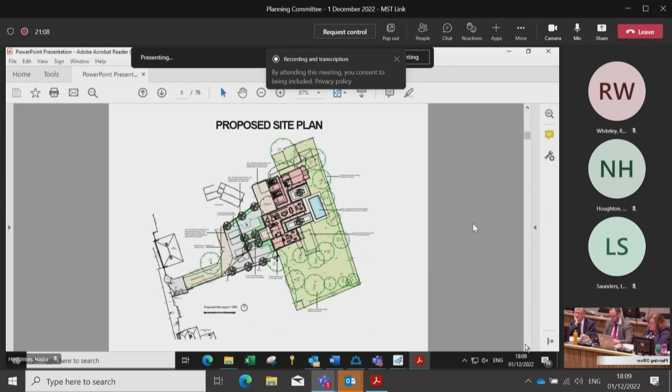So members viewed the site, and officers indicated where the replacement dwelling would be located, along with the location of the Orsett Conservation Area and Greenbelt boundary. This slide is one that I showed members at the site visit and have added to the presentation for people's benefit. You can see the blue line bisecting the site - to the left lies the conservation area, to the immediate right lies the Greenbelt.

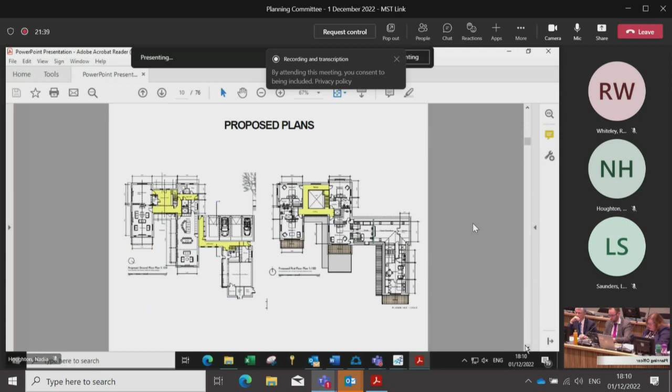There are no other updates for members since this site visit. The proposal would continue to be considered contrary to Greenbelt policy with respect to its overall size, footprint and volume, and would be considered inappropriate development harmful to the openness of the Greenbelt. Secondly, there continue to be concerns regarding the layout, footprint, scale and use of materials for the proposed replacement dwelling, and its poor relation to the existing character and appearance of the conservation area. The report and recommendation is as per page 40 in your agenda.

Happy to take any questions if any members have any. Thank you very much, Nadia, for the update. As we did say, not everybody on the committee can actually vote on this application this evening. Are there any questions for the officer?

Councillor Piccolo: Thank you, Chair. Can you just confirm if you found out - when we visited site, there were a number of mature trees along the back boundary and down the side. We were led to believe that these trees were on the boundary line, and the fence behind it has actually been in place for 20 odd years, in other words, they were there prior to the current landowner moving in. Can we just confirm that was actually the case?

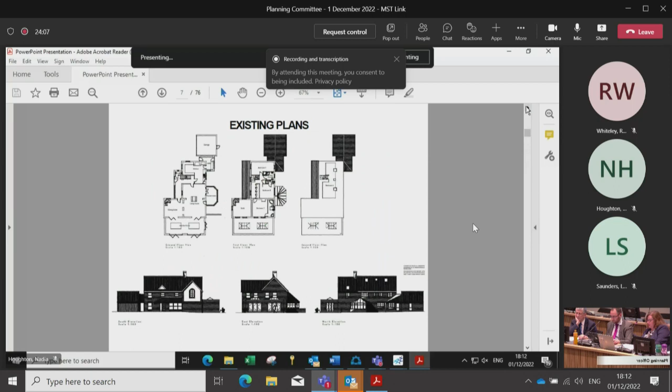I can confirm, I appreciate I wasn't at the previous committee meeting, but I understand what Councillor Piccolo's asking, Chair, with respect to the position of the boundary and its relationship to the curtilage of the dwelling. I can confirm that the Lawful Development Certificate from 2006 did identify the extent of that site as all falling within the red line curtilage of the property, as we saw on site, and indeed is shown on the plan. So what the officer is referring to, if you look at the boundary of the site on the far east, you can see what's indicated as a row of trees there. That forms the actual extent of the residential curtilage, which is also shown on the site plan. So that is as shown, if that answers your question.

It was just that was there, that's been there for some significant time, prior to the current landowner moving in. It's been there for many decades now, and that's shown in the planning history and the Lawful Development Certificate referred to before. Okay, fine, thank you.

Councillor Watson: Thank you, Chair. Can I just follow on from that question? If the new build went ahead, is any of those trees in jeopardy of being pulled down or cut down in order for the build to happen?

No, Chair, they aren't. Going back to the layout, that's probably the best one I can show you that shows it most clearly. The majority of the trees and the vegetation on the site would remain. There may well be the odd smaller tree and shrub that may be removed within the main part of the garden, but those lying along the eastern boundary and the southern boundary would remain.

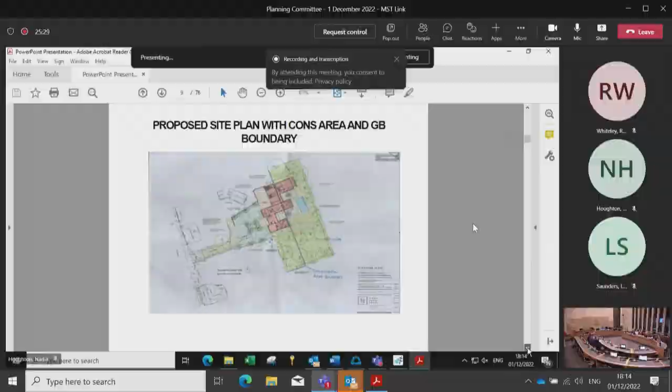Are there any more questions from the members for the officers? Councillor Piccolo: I don't suppose you'll have the answer to this, but do we know how regularly the footpath that runs along the side of the property is used? Is it well maintained?

We don't have any data in that regard, because none has been collected, but it is a public right of way. I've walked upon it whilst this application's been considered, because I wanted to see how accessible it is. It's easily accessible, and not just in that immediate part.

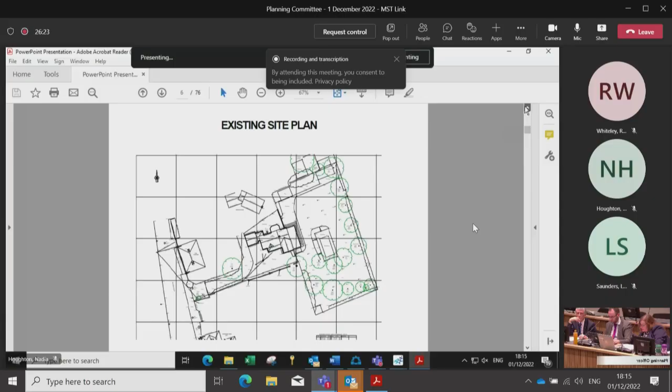So if I go back to the site plan, this one shows it best. If you can envisage where the Whitmore Arms is, I can show you on here. This is the Whitmore Arms. You can see where the cross is on the centre, just south of the Hollies, and this is the entrance to the footpath, which is clearly labelled. This part is hard surface, the immediate part that runs down past the side of the car park.

Then it becomes less hard surface, but it is well used. I walked certainly along to here, and at this point it's a track between the fields, but it's labelled, it's designated, and it's used. So that's as much as I can really comment with regards to how well used it is.

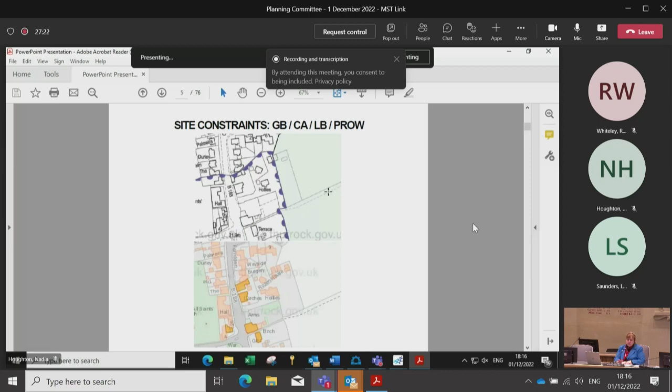I'm just going to take advice. Councillor Little, can I just ask the clerk - because you're excluded from this application, the same as myself, because we weren't at the previous planning committee, and you're not here as ward member this evening.

So just for clarification, so we are clear, Councillor Arnold, Councillor Carter, Councillor Piccolo, Councillor Watson, Councillor Shinnock and Councillor Tandy are the members of this committee that can actually ask questions, enter into debate and vote on this application.

Highways Engineer: Thank you, Chair. I would just mention that I took part in the charrettes for the local plan, where members of the public, local councillors and local people could talk about various bits. On the one I was on, it was mentioned that this is an important link between the village and the surrounding green areas, just to mention that.

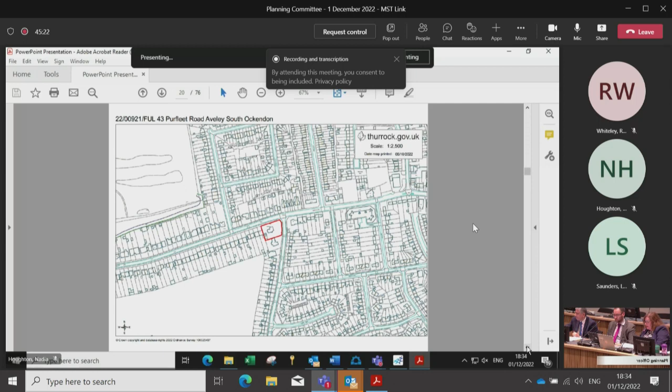The application site comprises a detached bungalow and garage building on a corner plot located within a residential area of Aveley. This corner plot is located at the junction of Purfleet Road and Love Lane, and the site is bordered by residential development.

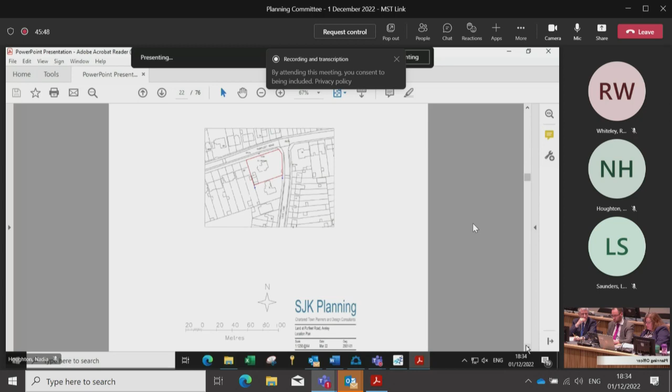Up until March 2021, the site had established trees along the boundaries as well as extensive vegetation on the site. The existing access is located on Love Lane and leads to a garage at the rear of the site. The site sits at a slightly elevated position above the main road on Purfleet Road, with ground levels sitting approximately 1.4 metres higher within the site compared to the highway on Purfleet Road.

The proposal seeks the redevelopment of the site to provide 5 dwellings, comprising 2 pairs of semi-detached 2-storey dwellings and 1 detached property. This layout plan shows the proposed layout with the dwellings located broadly along the notional building line of the existing pattern of development in Purfleet Road.

The existing access to Love Lane would be removed and a new vehicle access would be proposed, providing a 2-way vehicle access on Purfleet Road. The pedestrian access on Purfleet Road, which exists at the western end of the site, would be resited to the eastern half of Purfleet Road.

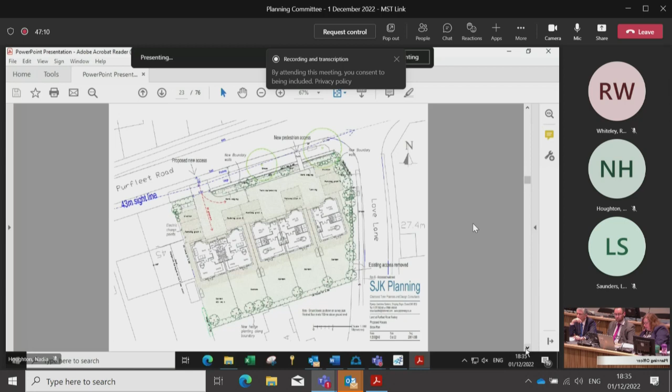The private rear garden serving the 5 dwellings would be 12 metres in depth at its maximum, which would be deeper than the previous refusal that members considered in June this year. While the rear garden depths would still be relatively short, the proposal would not be considered likely to result in such an unacceptable loss of privacy for the neighbour to the immediate south of the site on Love Lane to justify refusing the application for this reason.

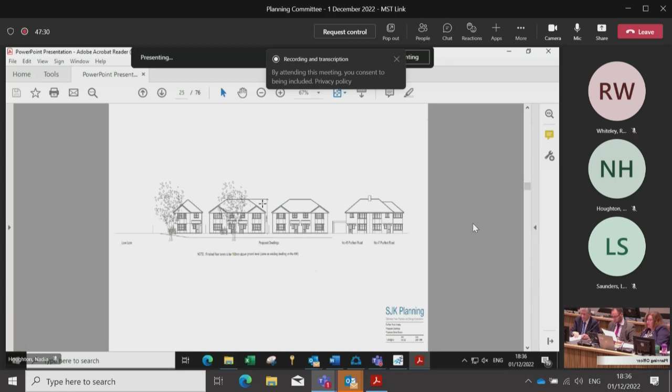Here's an elevation of the proposed street scene. As you're looking at it, the detached property would be closest to the corner, with the 2 pairs of semis fronting Purfleet Road, with the existing development to the right of the image. And here are some elevations of the proposed semi-detached pairs and the detached property, along with some floor plans. The proposed appearance of the properties would be considered appropriate.

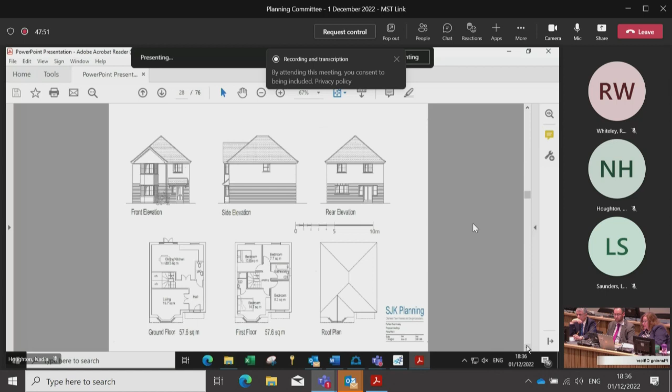The proposal would provide 12 parking spaces on a car-dominated frontage, which is a concern and is included as a reason for refusal. The internal layout is considered relatively tight with respect to manoeuvring, and there is particularly close proximity of parking spaces to the front windows and doorways serving the dwellings.

The applicant has been asked to provide additional swept path analyses to demonstrate that all car parking spaces could be safely and practicably accessed and egressed. The applicant has provided these; however, the highways officer is concerned that the layout would still be particularly awkward and tight, resulting in some spaces not being realistically usable, and there is concern that parking would migrate onto the surrounding roads, which would be unacceptable in this location.

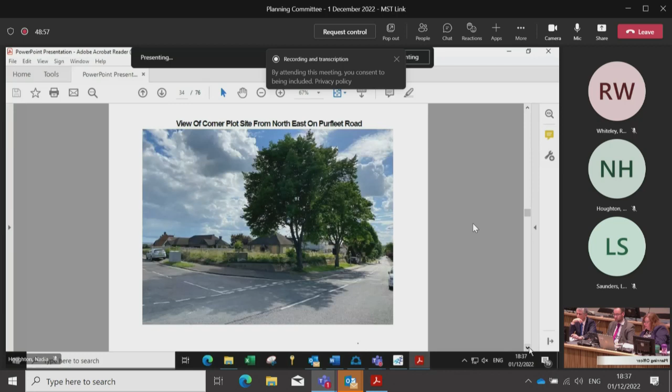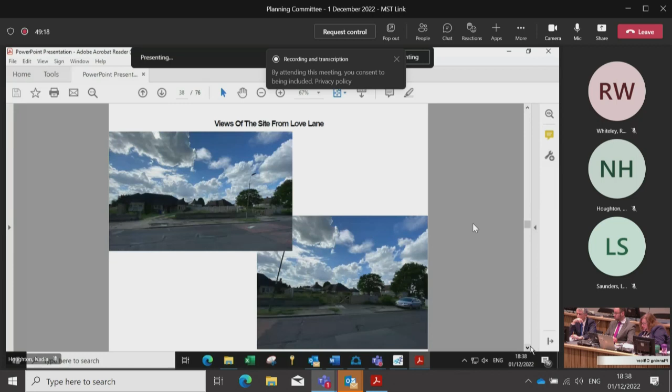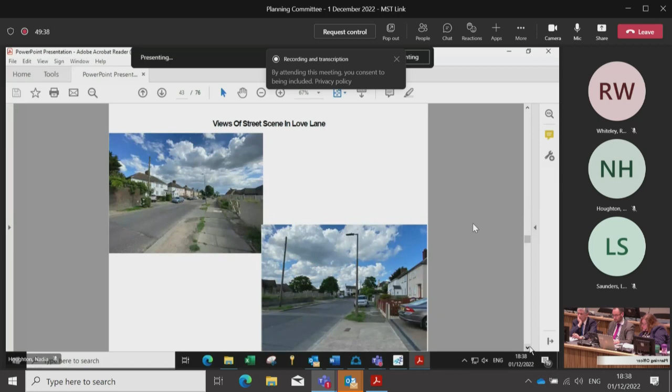There is concern that the proposals would, by virtue of the layout and the design of the frontage, the amount of hard landscaping, and the car-dominated appearance of the front of the site, be likely to result in a development which would appear cramped and detrimental to the character and appearance of the street scene. The proposals would also lead to highway safety and parking concerns, given the tight layout and awkward design of the parking spaces on the frontage of the site.

The application is recommended for refusal for the reasons on page 56 of your agenda tonight. Happy to take any further questions.

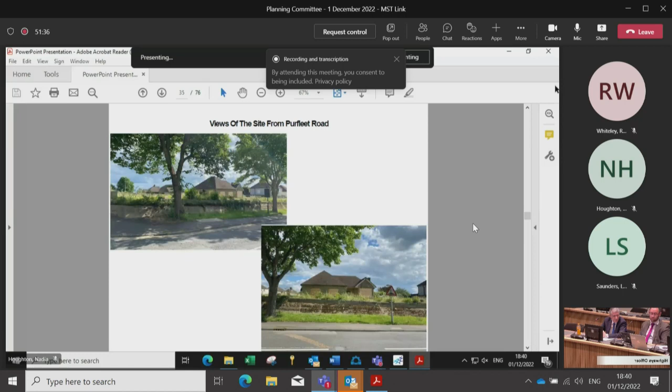Thank you, Chair. The likelihood is that they would service the development from the front. My guess is that if it was an ambulance, they'd probably just pull into the development, go up the slope, and park in between the first set of car parking spaces. There's plenty of room for an ambulance or a fire engine to get into the access - it's 4.8 metres wide, a standard access width that two cars can pass if needed, so they could get up and pull into the first bay. I would think it would be pretty tricky for them to get right into the site if they needed to, but I can't remember the width of the little road.

It's 3.5 metres, which I think should be sufficient for a fire engine to get in, depending on how well people are actually parked in there. As far as refuse collection, I think they've got their bins down the front, so like most properties along Purfleet Road, they'd be serviced from the front. So in an emergency, a service vehicle would have space to get in if it needed to. It might be tricky to get towards the end house, but they could get in close enough for access.

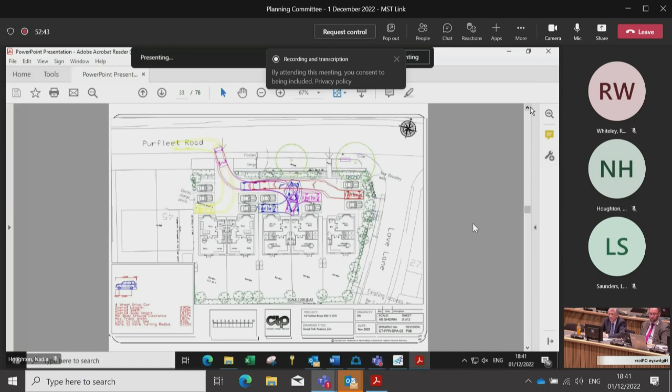Councillor Carter, then Councillor Thandy. Thank you, Chair. My question relates to the parking, in regards that it has enough parking spaces not including visitors, but how is that worked out in regards to this property? Because it's quite small, so it has to be one per household in Aveley.

Chair, I'm happy if Julian wants to answer that, or I can. It's quite straightforward. We have an adopted parking standard, and we also look at the level of accessibility for the area. In this case, the location is classed as a medium accessibility area, and we'd be comfortable with 2 parking spaces per dwelling. Bearing in mind these are 3 or 4 bedroom properties, but in this location 2 would be adequate, plus 2 visitor spaces, hence the 10 for the properties and 2 visitor spaces overall. But the main point of concern with this proposal relates to the layout and accessibility of those spaces. If they're not usable, then the likelihood of them being available and accessible is more challenging.

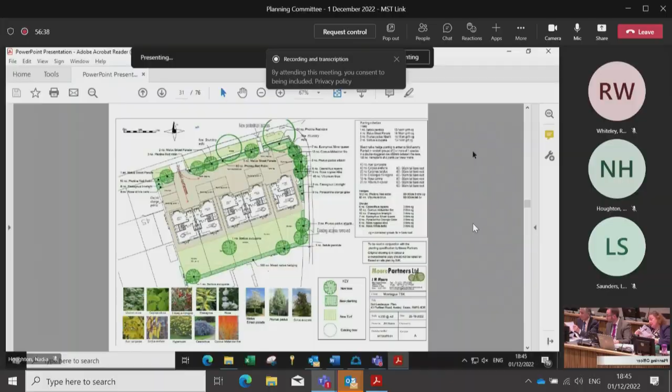May I just clarify which parking space Councillor Piccolo is referring to? The 6 parking spaces that run across the front of the houses, yep. There is a dimension on there after parking plot 3 to the curb line. Is it 3 metres or 3.4 metres? I don't know whether you can see it. It's not on that one. It's on the... It's not on the one that's up on the screen at the moment. It's actually on the... It's 3.4 metres between the 2 parking spaces for plot 3 and the back edge of the curbing and the start of the landscaping, which is at the centre there. It's 3.4 on the plan. Thank you.

Any further questions at this point from the committee? No. Okay, we do have a speaker on this application, Rakesh Kenneth from Montague. We'll now ask Mr. Kenneth to address the committee. Thank you.

Good evening, Chairman and members. Thank you for the opportunity to look again at the proposals for 43 Purfleet Road. Following discussions with the LPA's principal planner, we have made further revisions to the scheme to provide 4 semi-detached houses and 1 detached, comprising 2 three-bedroom and 3 four-bedroom houses. The Thames Gateway Delivery Plan proposes 2,100 new homes within Aveley. 43 Purfleet Road is a brownfield site within the existing settlement boundary. It is a windfall site. It has not been included on the LPA's Strategic Housing Land Availability Assessment Report, and the LPA currently cannot demonstrate a 5-year housing land supply.

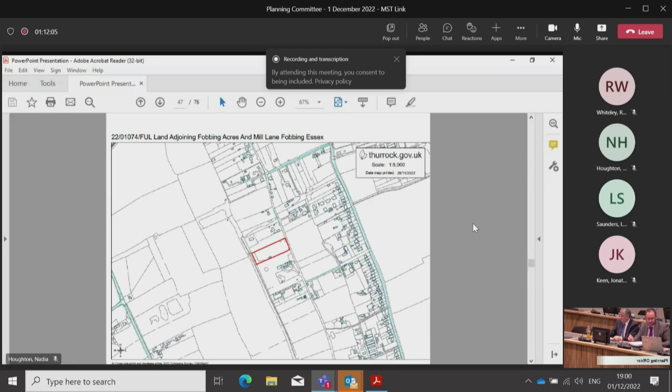So the application proposes planning permission for the use of the land as a residential gypsy traveller site and for associated operational development comprising the stationing of a static caravan and formation of a gravel driveway. That's the application site in front of you in red. That's High Road in Fobbing, and this is Mill Lane, which runs parallel with the High Road. That's an aerial photo of the site. That's a zoomed in site plan showing the entrance to the site in the northeast corner. And that's the proposed layout using the same entrance and the siting of a static caravan with a driveway in front.

And that's a plan and elevation showing what the proposed caravan would look like.

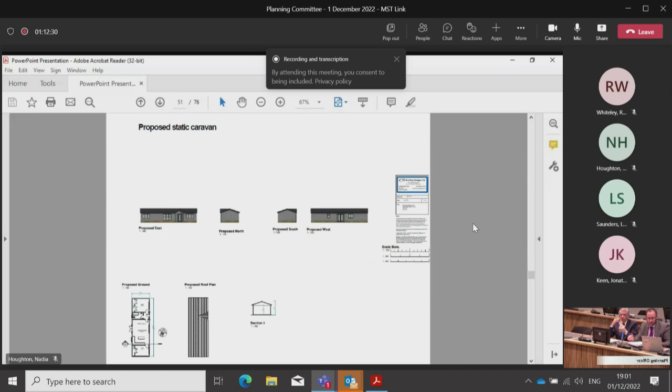So the application site is an unallocated parcel of grazing land within the Greenbelt. As indicated, sites within the Greenbelt for residential caravan development is inappropriate development and is harmful by definition.

The planning policy for traveller sites clarifies that personal circumstances are not very special circumstances that would give weight to such a development in the Greenbelt, and the onus is on the applicant to demonstrate that circumstances exist to overcome the intrinsic harm caused to the Greenbelt by the intrusion of new development.

The matters put forward by the applicant include a lack of supply of sites, and whilst it is acknowledged the council does not currently have an identified supply of sites to meet a rolling 5-year supply, the council is working on a new GTAA to develop a plan for new traveller sites in the Greenbelt, and this is not a reason to allow ad hoc development in this case.

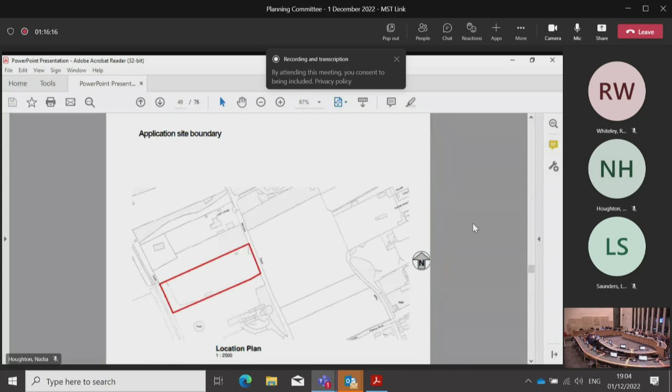Yeah, I took the opportunity to seek this piece of land out today. It is incredibly hard to find. You do actually have to go along, I would say, at least half a mile of unmade road to get to it. And where this site is, after the unmade road, it then descends into just grass and mud and soil path.

I would say actually, probably on an application like this, it really would be beneficial if we could have an aerial photograph of the site rather than the grainy map, because from the map that I saw in the agenda, you really can't make out where on earth it is.

When I actually got there today, like I said, a few residents came out to see me because they wanted to know who I was and what I was doing there. And luckily they actually led me to the site so I could find it.

During that conversation, it was suggested to me that the access lane to the site is actually owned by somebody else and there is registered title on that land. Can you confirm whether this is or isn't the case? I'm also told that the person objecting has written to the council.

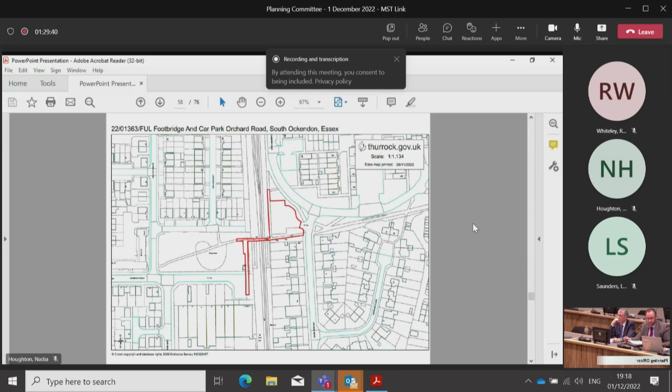This application seeks planning permission for the removal of the existing pedestrian footbridge and the erection of a new pedestrian footbridge and ramped access across the railway line between Orchard Road and Ardmore Road in South Ockendon. You can see the application site here, it's an irregular shaped site, so the footbridge would head south along there and north up there. It also comprises part of the car park to the northeast, where there are some changes to the parking layout. That's an aerial photo at present showing the car parking area and the footbridge.

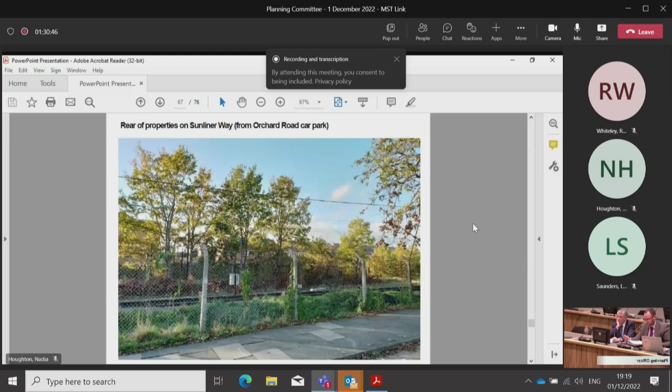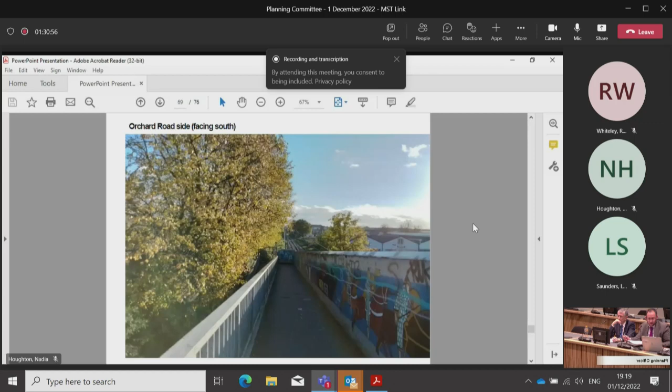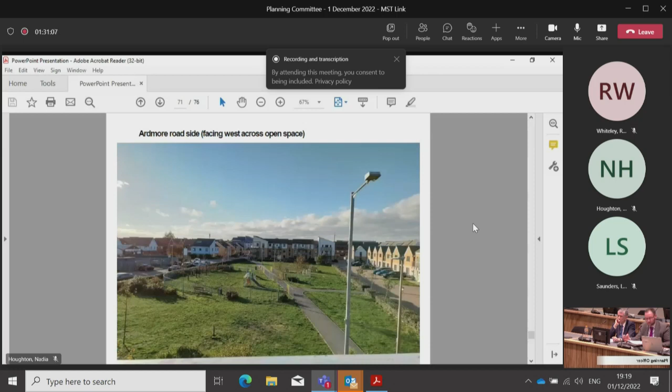These are some existing photos. That's the car park on Orchard Road looking towards the existing bridge. That's another view from the pedestrian footpath looking west towards the bridge from the car park. That's looking north along Orchard Road with the car park to the northeast. That's looking from the Orchard Road car park across the railway line. That's looking from the footbridge south along the back of properties on Orchard Road. That's looking down the ramp on the Orchard Road side. That's looking across towards the Ardmore Road side from Orchard Road. That's looking towards Ardmore Road from the top of the bridge. And that's looking towards the bridge from the Ardmore Road side. And that's a wider picture looking towards the existing bridge.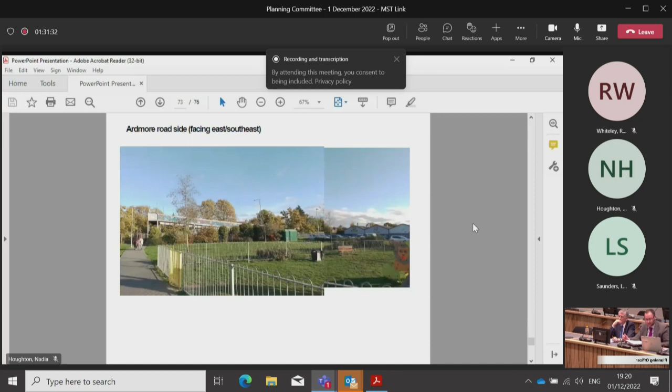The existing bridge is in poor condition and requires refurbishment. At present, the bridge doesn't comply with modern accessibility standards, and the replacement bridge would allow current accessibility standards to be met and provide long-term solutions at this key crossing point. The replacement bridge will be largely in the same location as the existing bridge, but with longer access ramps for better access for disabled users. The ramps would need to be longer due to the shallower gradient required for disabled access.

The design of the bridge is fairly functional and replicates many other bridges throughout the borough and the county, so there are no concerns in terms of design. As there are longer ramps, there's potential for more views from those ramps towards nearby residents, but it's not considered those would be harmful.

The highways team don't object to the application, and this is a key crossing point in the middle of South Ockendon. The existing bridge is in such poor condition it would cost more to repair than to build the new bridge. So it's recommended for approval on the basis of its positive benefits.

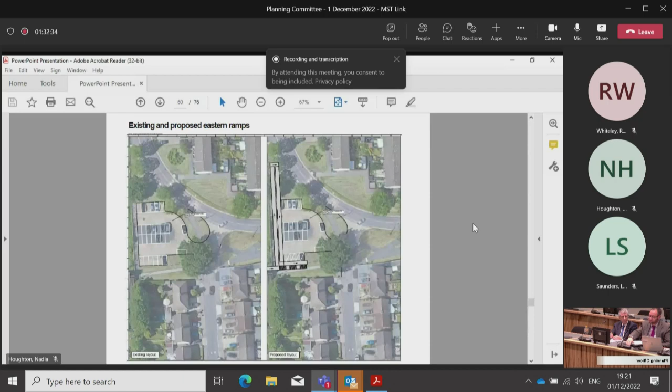Thank you, Chair. Couple of questions. With the new bridge, will there be more lighting, and will the lighting be shielded from being seen from houses or existing places?

The design team, as part of the scoping process, recognised there is antisocial behaviour on the bridge, and they will be looking at improved lighting. I understand what they were looking at was down lighting, either under the handrails or under the parapet, so it wouldn't be something that caused harm to neighbours. It's been fully considered.

My other question is about the type of fencing. Will it be solid fencing going along there? If you go back to your plans, will there be a lot more fencing, and what would be the height of the fence?

There shouldn't be more fencing. The bridge itself has a palisade appearance, with screening and landscaping afforded by some of the existing vegetation, and there's a condition for the applicant to provide additional landscaping around the bridge where they can. So it wouldn't be solid wooden fencing or anything likely to attract graffiti, or make it dangerous for someone walking along there at night—at the moment it's very open, so if you screamed people would hear you, but perhaps not if there were more fencing.

I understand the applicants worked with the designing out crime team at Essex Police in putting together the solution before us tonight. So the issues of crime have been considered, and as I said, the appearance of the bridge has open elements to improve safety and vision through it and from it.

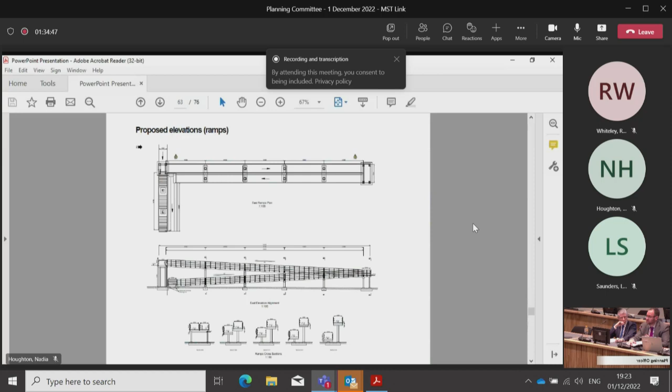Thank you, Chair. Obviously welcome this new bridge, anything is an improvement. There's a lot of new properties on one side of the footbridge, so getting from A to B from one side to the other is very good. Are there any measures in place to stop quad bikes etc. from accessing the bridge and shooting across? I don't know what the accessibility is at the bases of the bridge.

I'm not sure the plans have got that level of detail on it. It is something the applicants had looked at with the designing out crime team. I think one of the agents for the applicant is here, so he will have heard members' concerns about those issues, and they can be taken back and looked at in terms of the final structure of the bridge. I think that would be helpful. Obviously the access has got to be wide enough for pushchairs, wheelchairs etc., but if anything can be put in place to stop vehicles accessing it, I think that would be very advantageous. Thank you.